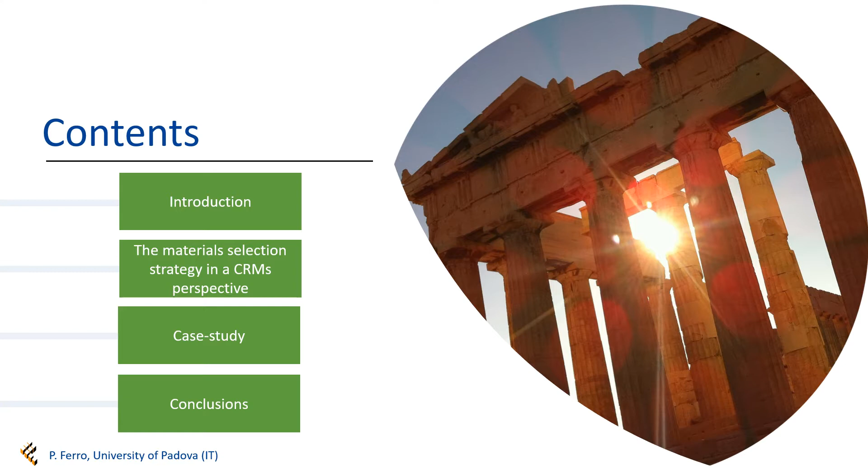What are critical raw materials? Critical raw materials are those raw materials that are, number one, economically and strategically important for the European community, and number two, they suffer from a high supply risk.

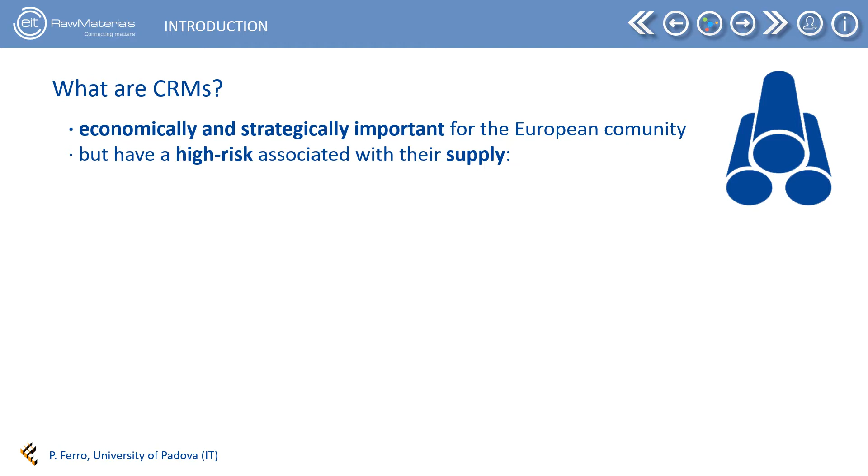Think, for example, of those materials linked to green economy, electric vehicles and batteries. But we can find them also as alloy elements in mechanical components. Therefore, some alloys are more critical than others. Mitigating actions are required to reduce the issues linked to critical raw materials, such as substitutions, increased material efficiency, and recycling.

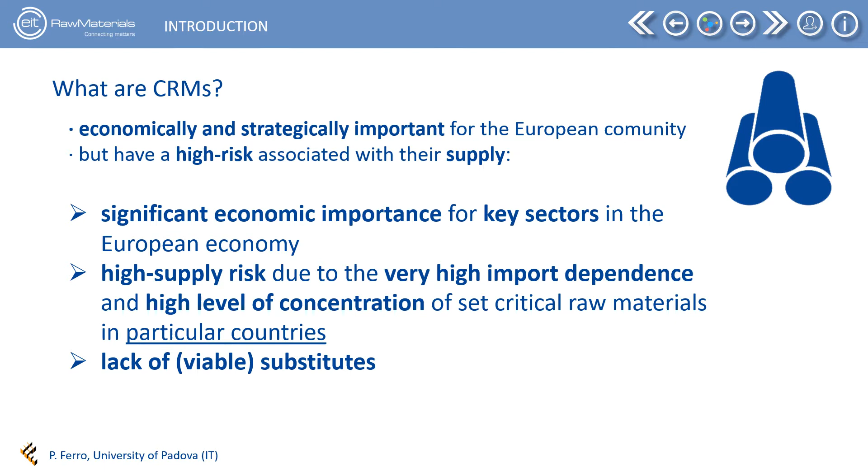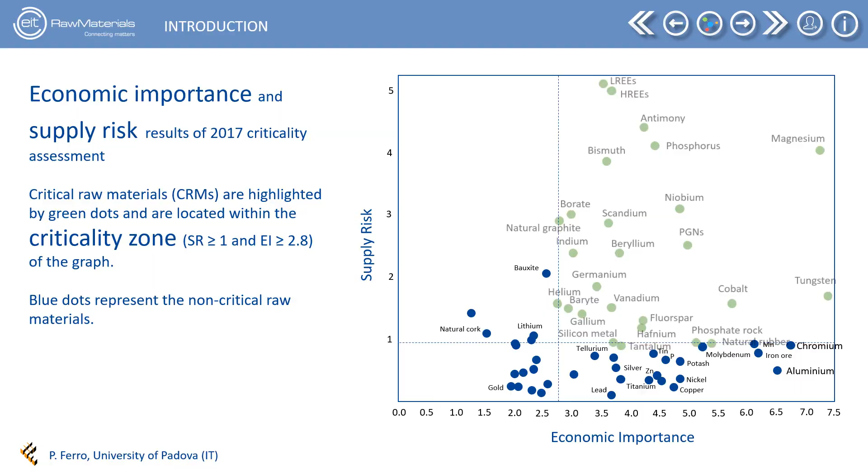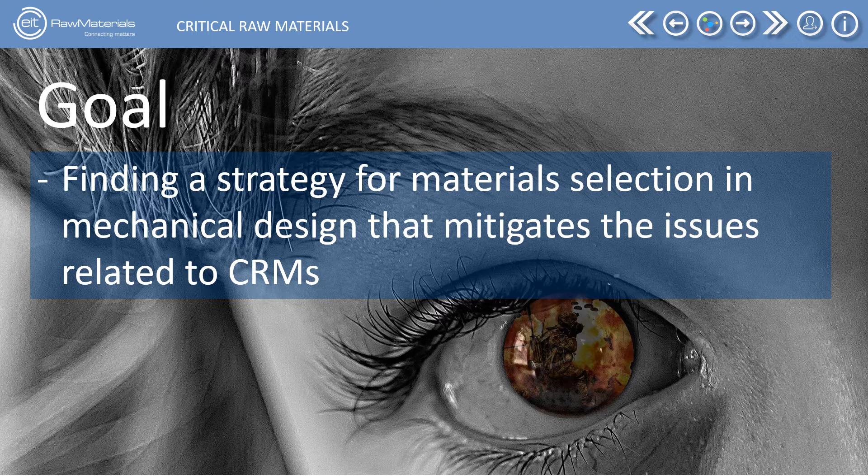The goal of this work is to find a strategy for material selection in mechanical design with the aim to reduce the drawbacks linked to critical raw materials. The proposed methodology is based on the alloy criticality index definition and follows the method first developed by Ashby.

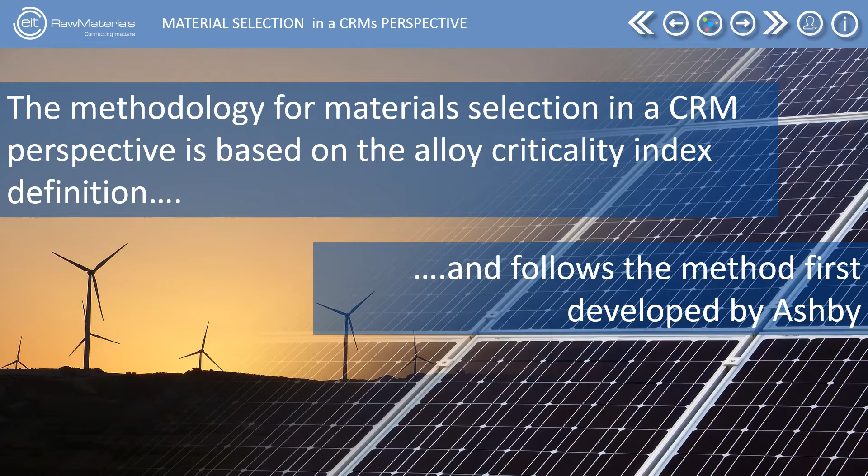They are the abundance risk, the sourcing and geopolitical risk, the supply risk, the economic importance, the end of life recycle input rate, and environmental country risk as well. Their formula and values are defined by the European Commission, and the list is updated every 3 years.

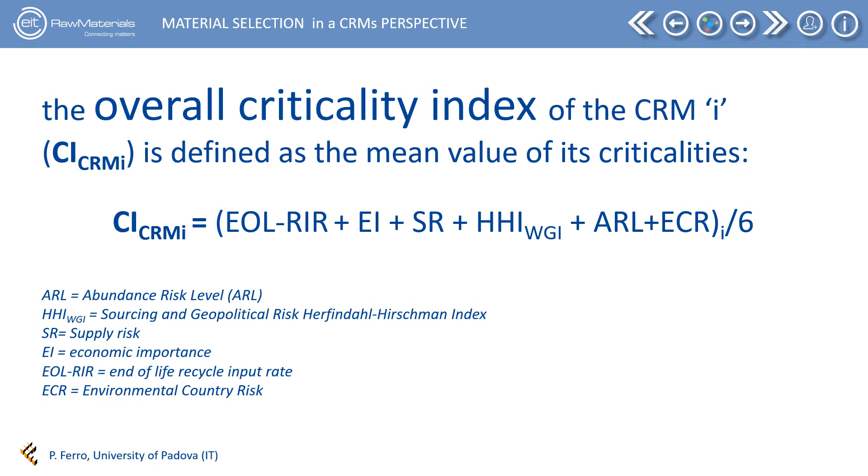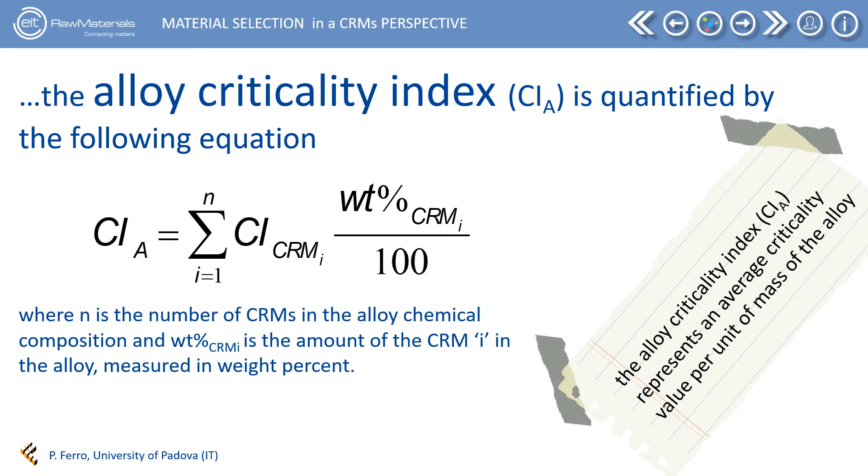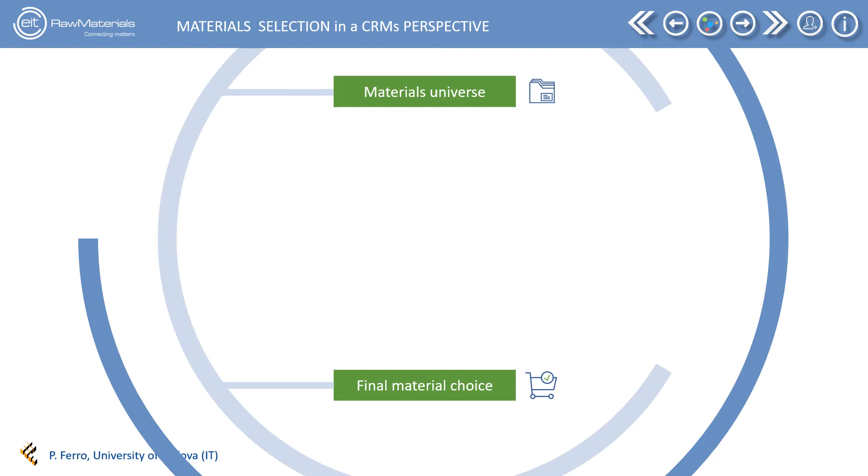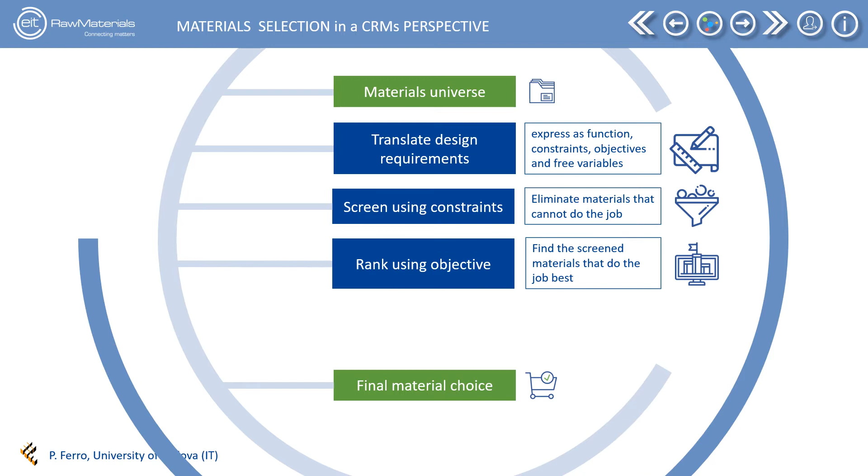Now, the material selection strategy is based on the famous Ashby approach that consists of 4 steps. Number 1, definition of the design requirement in terms of constraints, objectives, and free variables. Number 2, screening using constraints. Number 3, ranking using objective. And number 4, seeking supporting information.

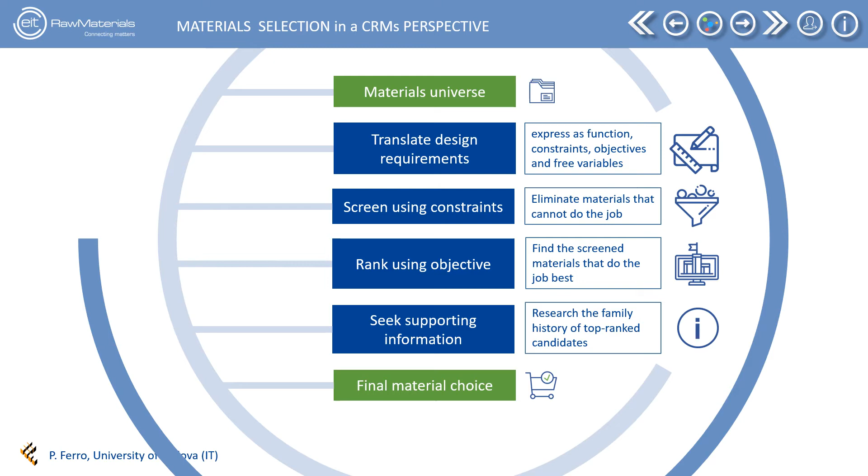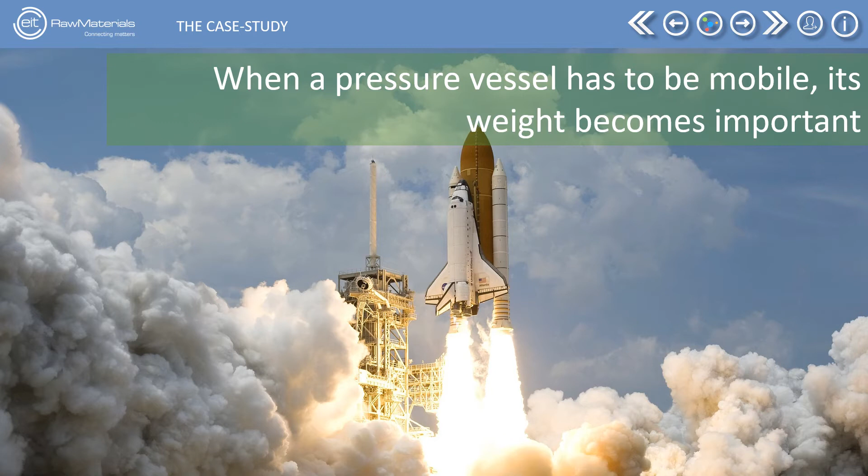As a case study, I'm going to show you the procedure for material selection in a new pressure vessel design. When it has to be mobile, its weight becomes important. Aircraft bodies, rocket casings, and liquid natural gas containers are examples. They must be light, and at the same time they must be safe. Therefore, they must not fail by fast fracture.

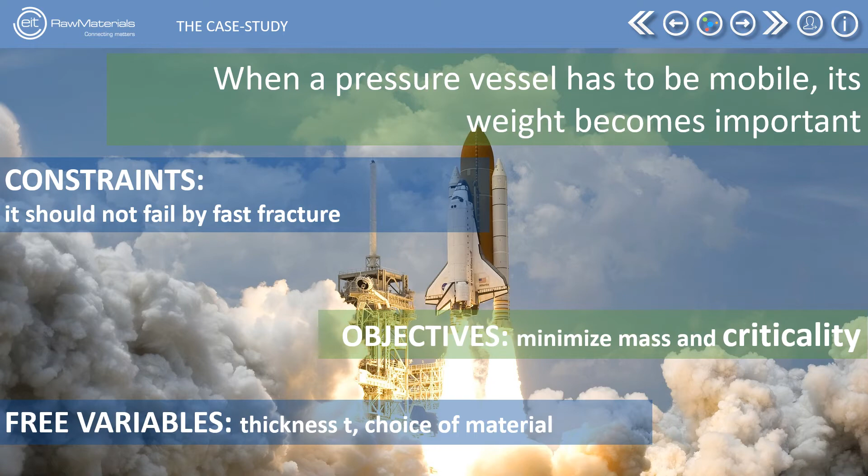The free variables are the material and the thickness. It is assumed that the component is, for simplicity, spherical of specific radius r, and that the wall thickness t, the free variable, is small compared with r. Then the performance equation for the mass m of the pressure vessel is given by the following formula, where ρ is the material density.

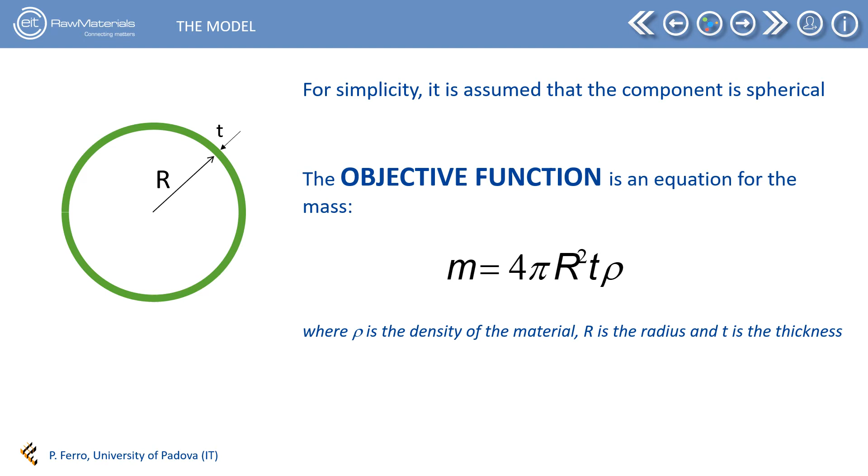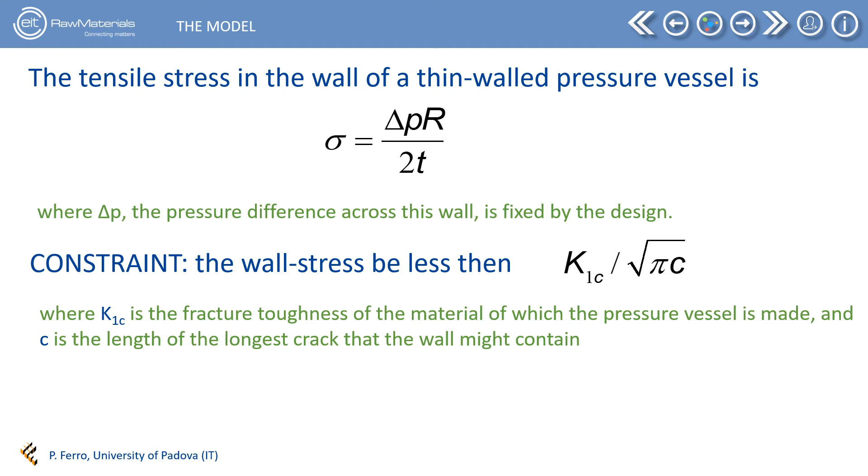By equating the tensile stress in the wall of the pressure vessel with one that promotes unstable crack propagation, it is possible to obtain the value of the free variable t. Now, by substituting the just obtained free variable expression into the objective equation, the mass, and by isolating the material's properties only, the material index M is obtained.

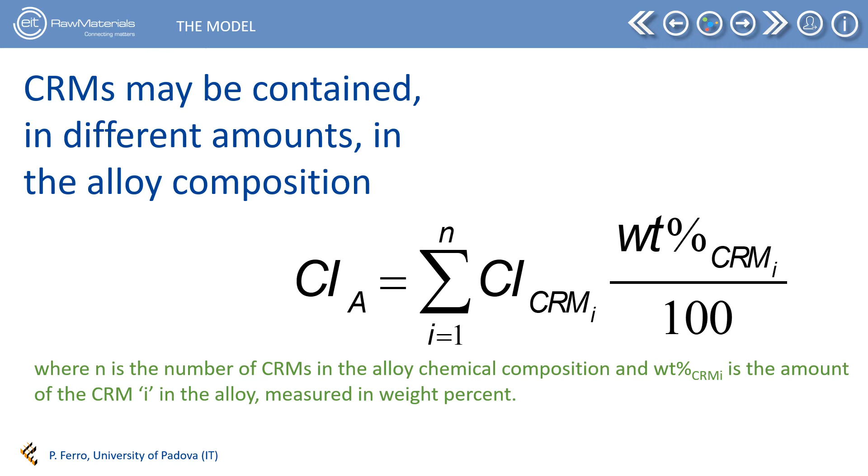Now, critical raw materials may be contained in different amounts in the alloy composition. Therefore, an alloy criticality index can be defined as described before. So, in a critical raw material perspective, the objective to be minimized will be the criticality of the design component. This objective is formulated by multiplying the mass of the component M by the alloy criticality index.

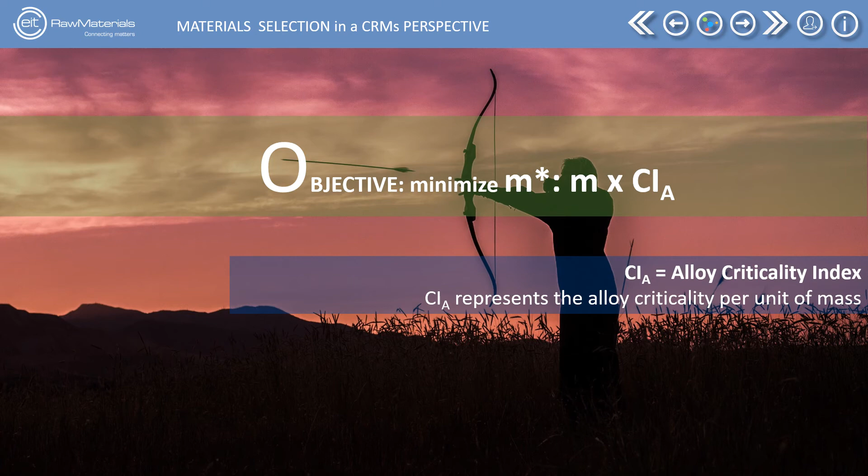Following the same above described procedure, the new performance equation and index M star can be easily obtained as shown in this slide.

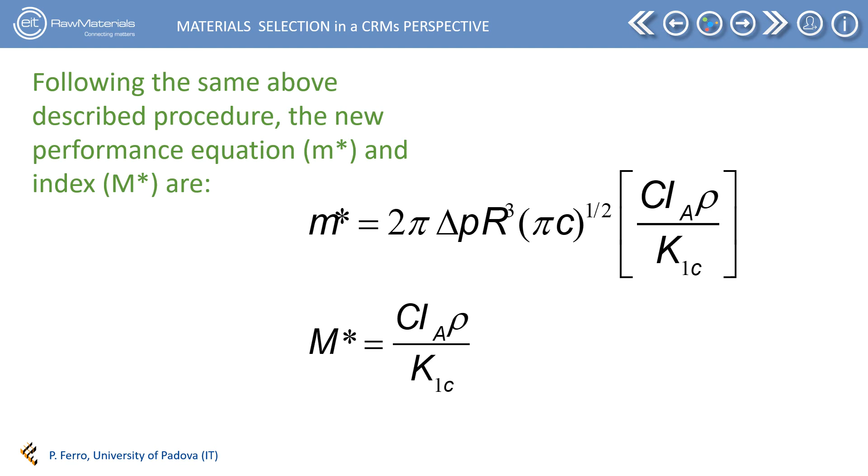Pressure vessels are commonly made by low alloy steels. For substitution purposes, it is therefore more convenient to plot the relative values of the material indexes as shown in the figures, where M0 and M0 star are the material index values of the actual pressure vessel steel. The point of coordinates 1, 1 in this figure is occupied by the steel to be substituted. The two straight lines across that point divide the plot into 4 quadrants named A, B, C, and D.

The solutions stay in quadrant A, where alloys that allow producing both less heavy and less critical pressure vessels are found.

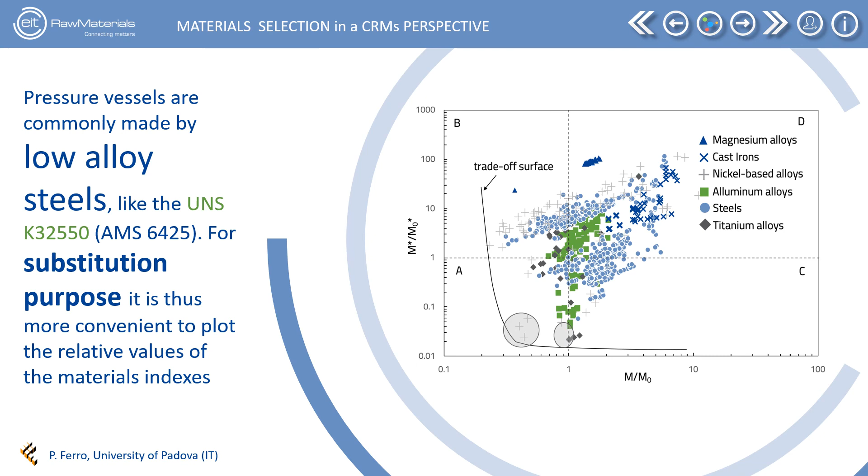In this example, if the criticality issues are evaluated much more seriously than weight reduction, the solution moves to titanium grade 1 or the aluminium AA 1080. On the other hand, if the criticality issues and weight reduction are evaluated equally, the nickel-based alloy should be considered as a good substitute in a critical raw material perspective.

Finally, verification and supporting information are needed now. Think about limits in the free variables, for example, but anyway, the method allows systematically reaching other possible solutions.